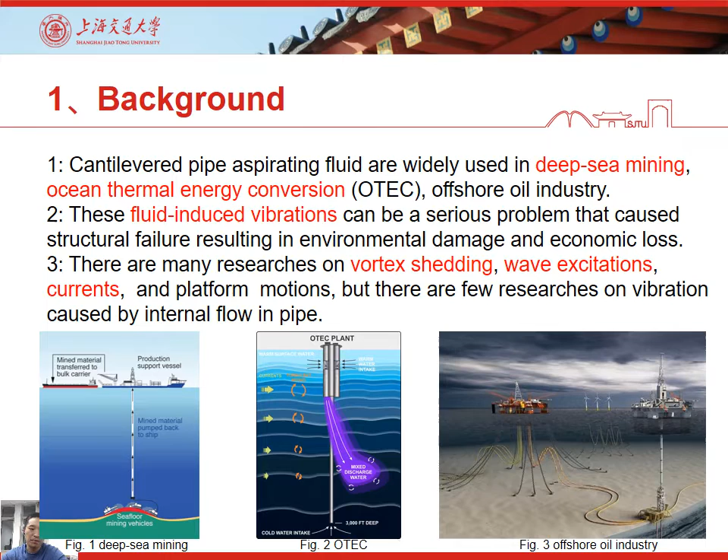Second of all, 2 different diameters of the pipe were selected for the internal pipe flow vibration experiment. The water is pumped into the pipe through the experimental pipe, and then the water re-enters the experimental pool through the discharge pipe. The pipe gets energy from the internal flow to generate vibration, and the tip displacement time history is recorded through the non-contact displacement sensor.

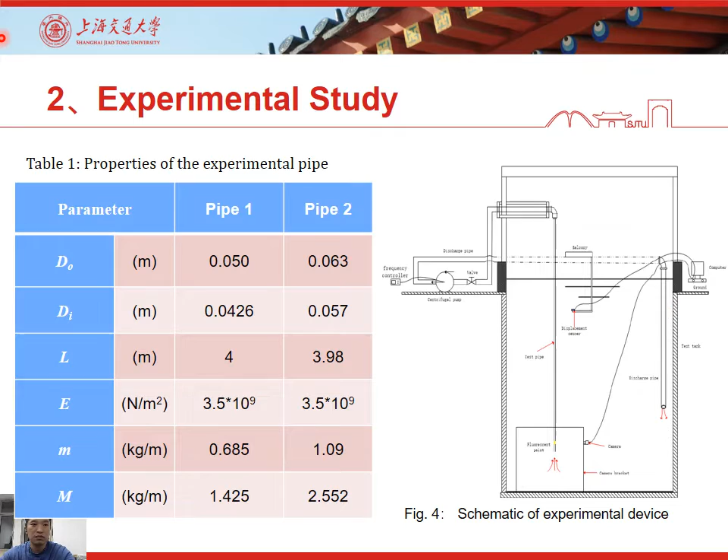The experimental setup was built at the Underwater Engineering Lab, Shanghai Jiaotong University, in a large-scale water tank with length, width, and height of 5 meters. The oscillation frequency and amplitude of the pipe were measured by changing the pipe internal flow velocity. Measurements were mainly obtained by a non-contact laser displacement sensor and an underwater camera.

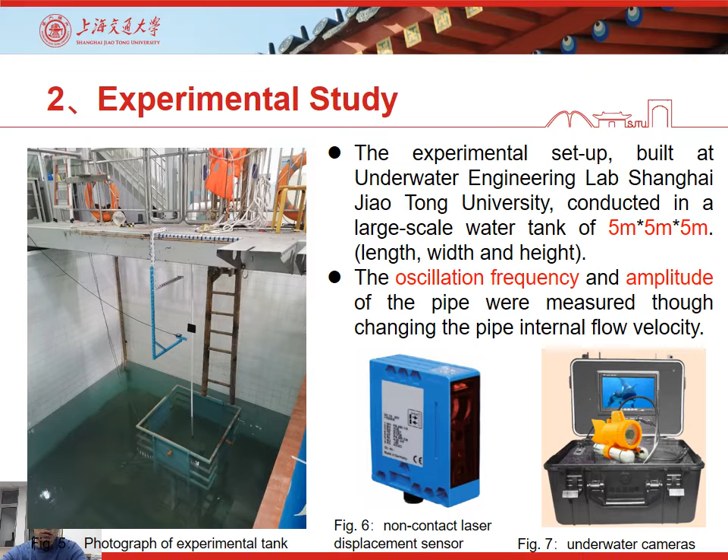We obtained the following conclusions from the experiment. This figure shows displacement of pipe 1 measured by the displacement transducer for internal flow velocity 3.2. For velocity 3.2, the pipe shows complex motion, switching between flutter of considerable amplitude one minute to shudder motion the next. The amplitude and the frequency of the motion significantly increase as the internal flow velocity increases.

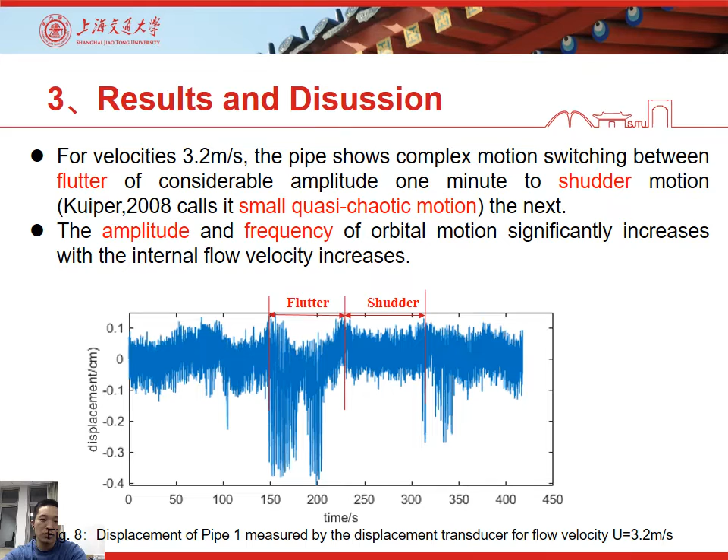This figure shows time-frequency analysis of the vibration response for pipe 1. Figure A shows shudder motion, and figure B shows flutter motion. From this figure, the response energy in the shudder vibration is low, and there is no large energy gathering at a certain frequency.

The 2 figures show the response energy concentrated at 0.42 Hz for the majority of the cantilever pipe. It further confirms that the cantilevered pipe flutter response is dominated by the first mode.

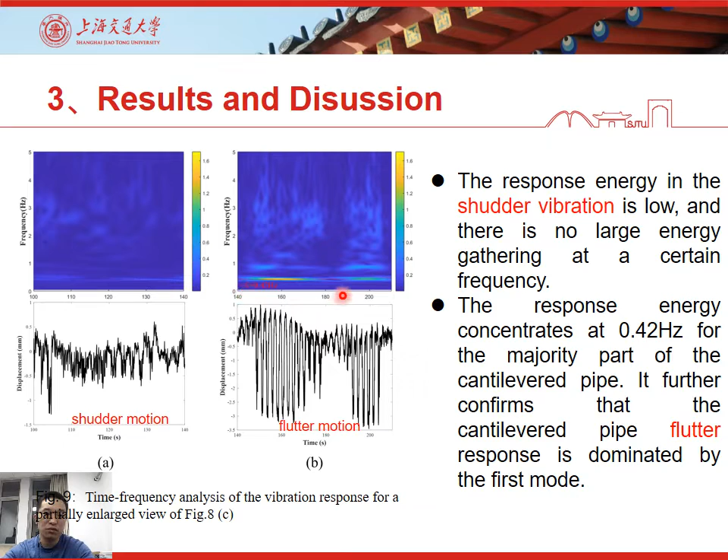From this figure, the internal flow excited response of the pipe is identified in 3 regions: the static region, pre-instability region, and post-instability region. In the static region, the pipe is still in a static state. In the pre-instability region, the pipe started to vibrate, but the vibration amplitude is small. For the post-instability region, the flutter critical velocity is defined as the point of intersection of the linear fits of the two regions, pre- and post-instability.

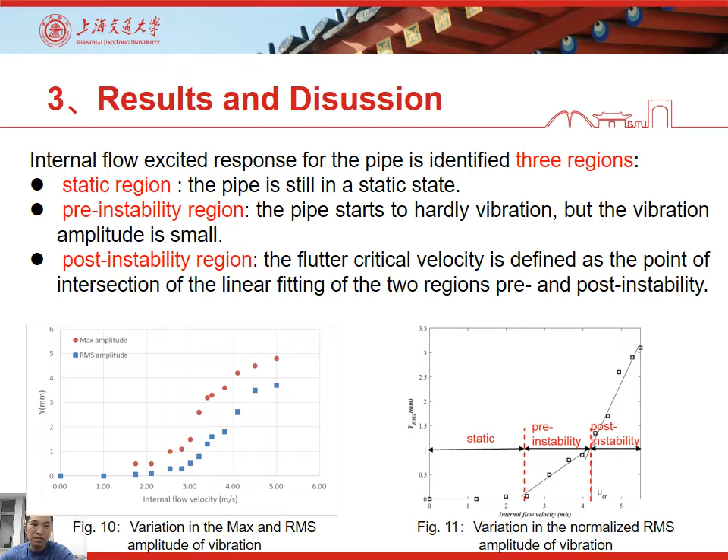This figure shows power spectral density of the displacement time series obtained at different flow velocities. We obtain that the vibration frequency increases slightly with increasing flow velocity. This is because as internal flow velocity increases, more fluid energy is obtained at the free end of the pipe, which increases the vibration frequency. The vibration frequency increases slowly because of hydrodynamic drag caused by the surrounding water.

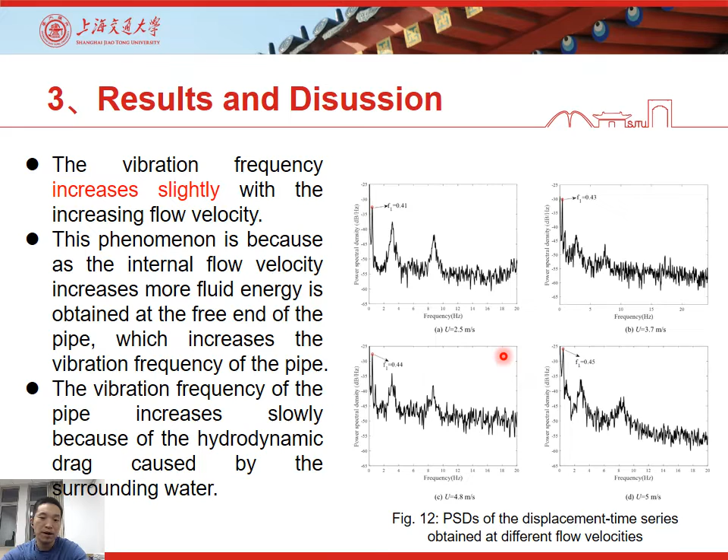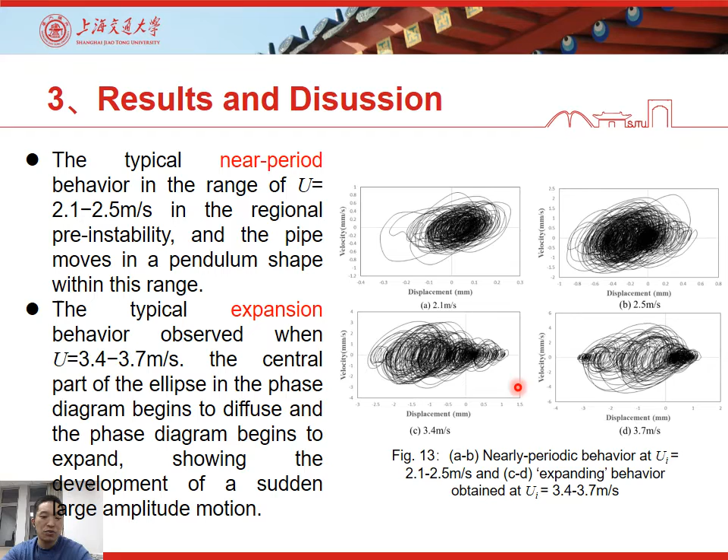From this figure, the vibration frequency of the pipe decreased as the submerged depth of the pipe increased, for internal velocity 3.7. Most of the energy is concentrated near the flutter vibration frequency, indicating that the instability of the pipe is dominated by the flutter motion.

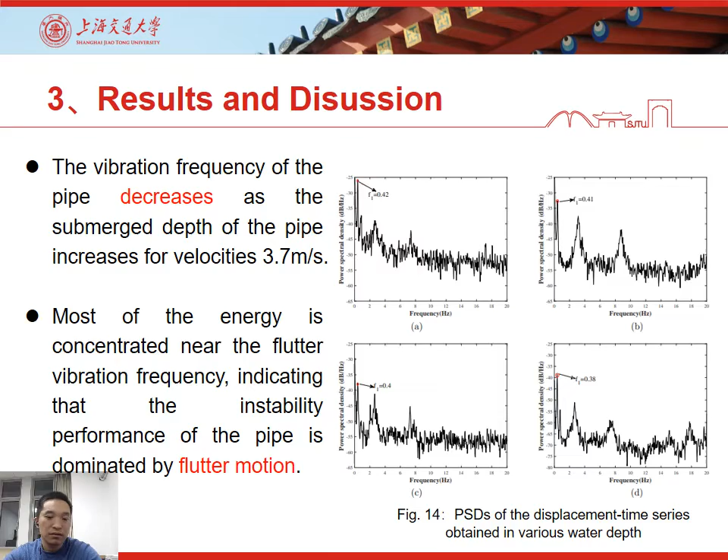The experimental results for the critical velocity with increasing pipe immersed length for pipe 1 and pipe 2 are presented in figure 15. The critical velocity increases with increasing pipe immersed length. The main reason is that the considerable hydrodynamic drag generated by the surrounding water would damp out any small oscillation of the pipe.

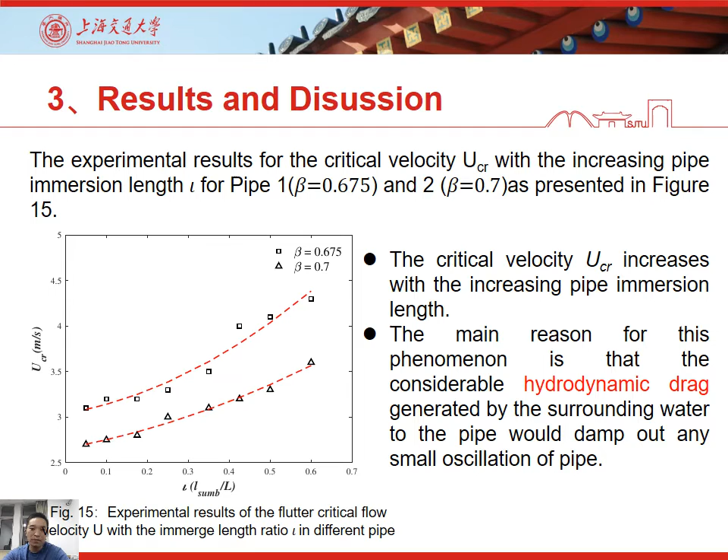In summary, the main conclusions of the experiment are as follows. First, the pipe shows a complex motion consisting of two alternating phases, an approximately flutter motion and a shudder motion with a small amplitude. Second, the internal flow excited response of the pipe is identified in 3 regions: static region, pre-instability region, and post-instability region.

Third, the increase of flow velocity will increase the amplitude of the pipe motion, but will not qualitatively change the pipe motion. Finally, the fluid around the pipe will also affect the critical velocity. As the immersed depth of the pipe increased, the critical velocity of the pipe also increased.